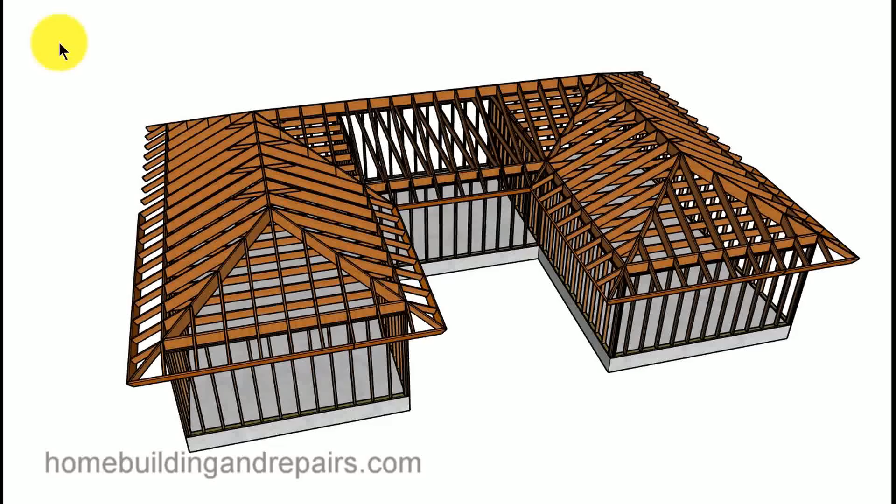Here's a project someone requested. They wanted to know how you could build a room addition in between two hip roofs with a shed roof. Let's go ahead and take a look at the framing here, give you an idea of what we're dealing with.

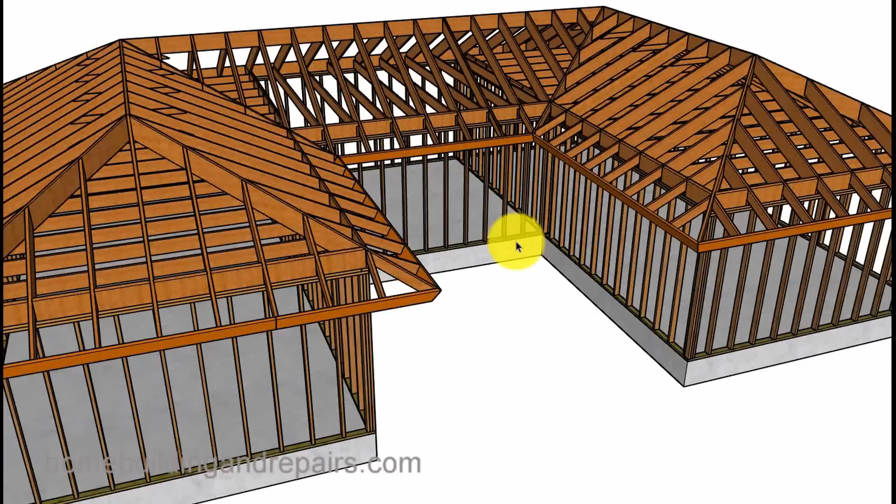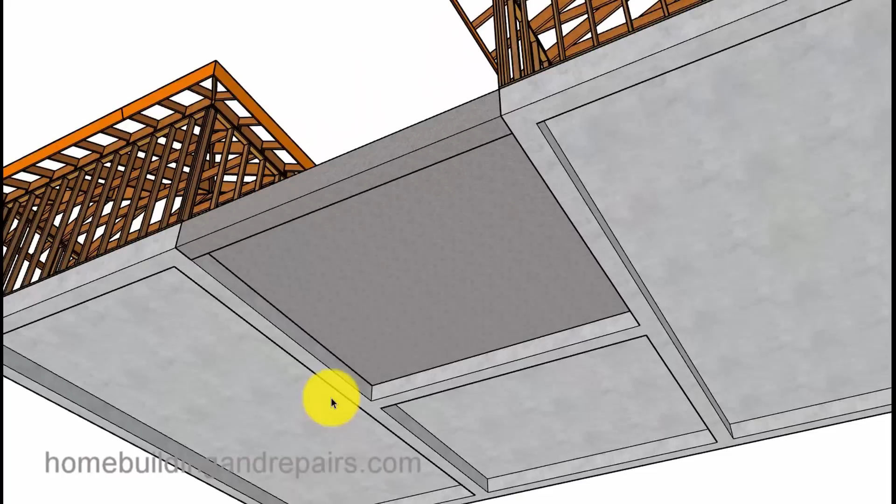And again, my drawing is not going to represent every home that is built this way. We need to keep this in mind, especially when it comes to the ceiling joists that could alternate directions. Let's go ahead and start with the foundation, and mainly the video is going to be about the roof framing, but I figured I would throw this in there.

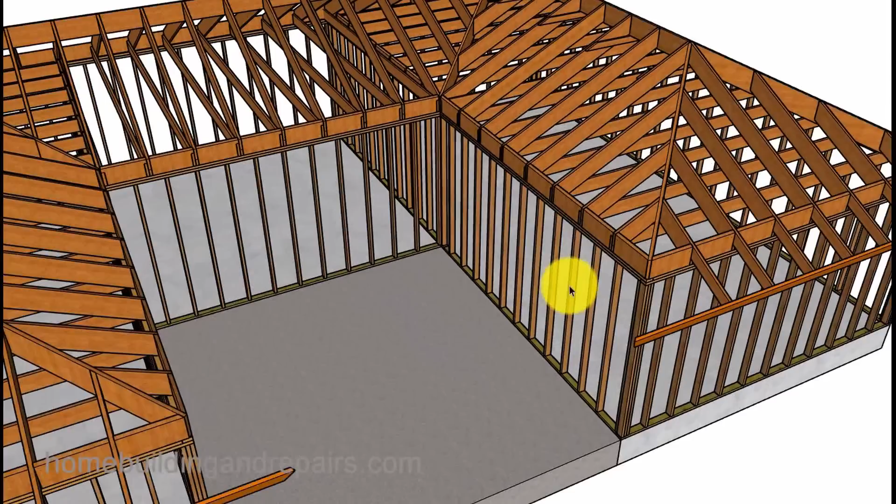You would have an existing foundation with load-bearing concrete footings. You would also need a load-bearing concrete footing in the front for this type of design. And you would need to cut the roof rafters back. Going to need to make it even there, so the overhang will get cut off. The hips will need to be cut off at the corners so that you can create a nice flat surface to build with.

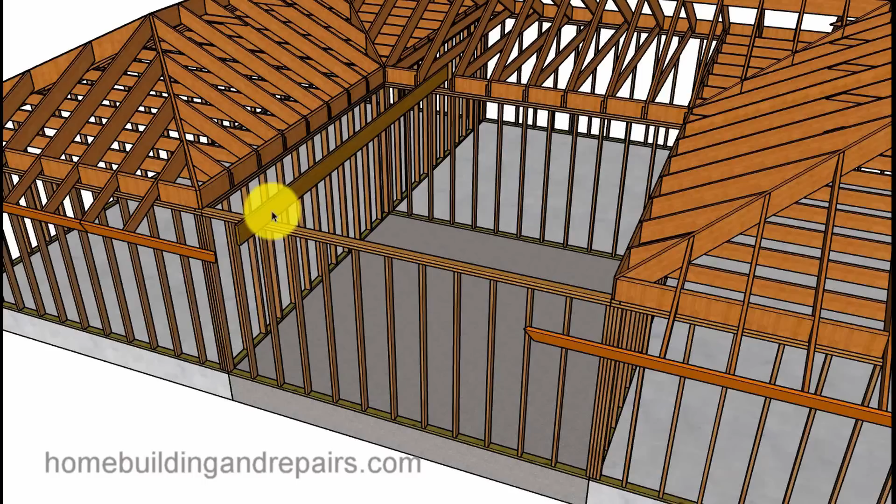Now the next thing you need to do is figure out the pitch of the roof rafter and whether or not you will be happy with a sloped ceiling. If you want a flat ceiling, that will be the last design in the video, I believe. And if you want to have a sloped ceiling and a sloped roof, then you will need to raise the back end of the rafter and the ceiling joists, of course. And don't forget to allow for insulation.

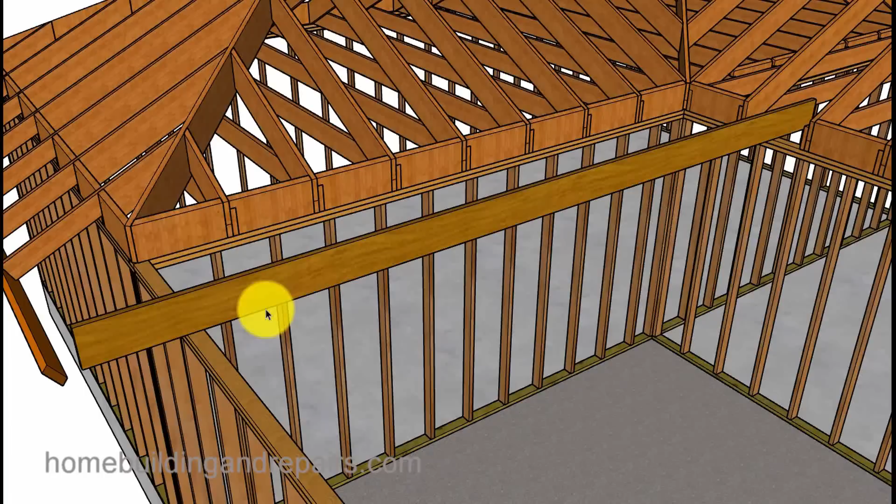The minimum size for a roof rafter that's going to be used for ceiling joists will need to fit the insulation in it. So I'm using a 2x10 here that will be fine with R30 insulation if that's what you're using in your area. Now let's go ahead, and I sloped these. I provided you with a few different ones.

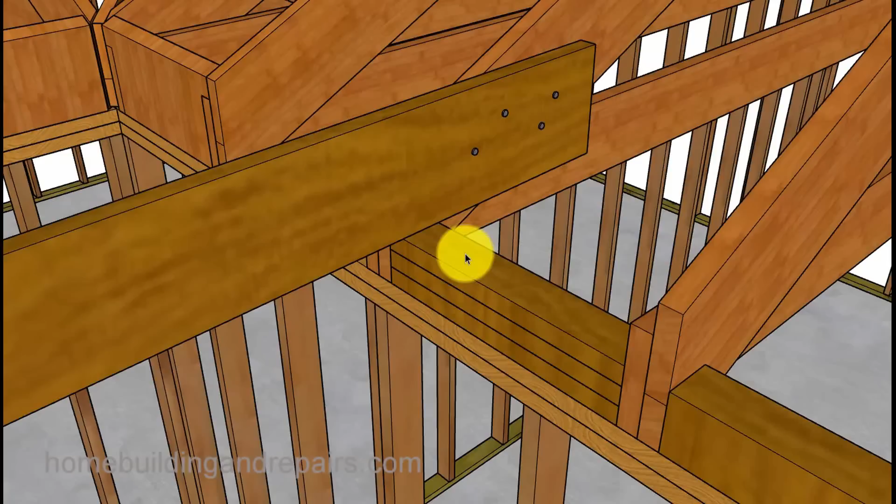You can figure out the slope, and the slope is usually going to be 1/4 of an inch per foot minimum. I like to go with something a little longer, but we have a 16-foot span. So we need to go up at least 4 inches. If I use three 2x4 blocks on top of the framing plates, that'll give me 4.5 inches, which would be fine. You will need to nail these roof rafters to the existing roof rafters, or the ceiling joists, at least every 4 foot to get a good tie.

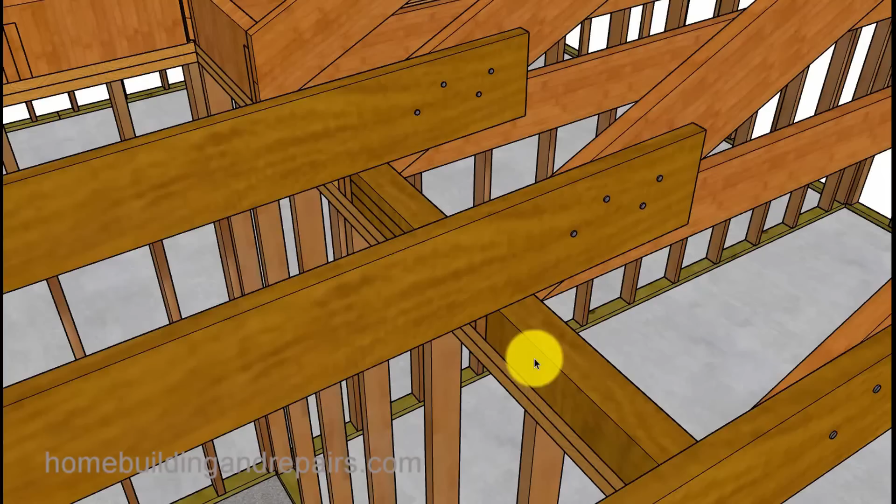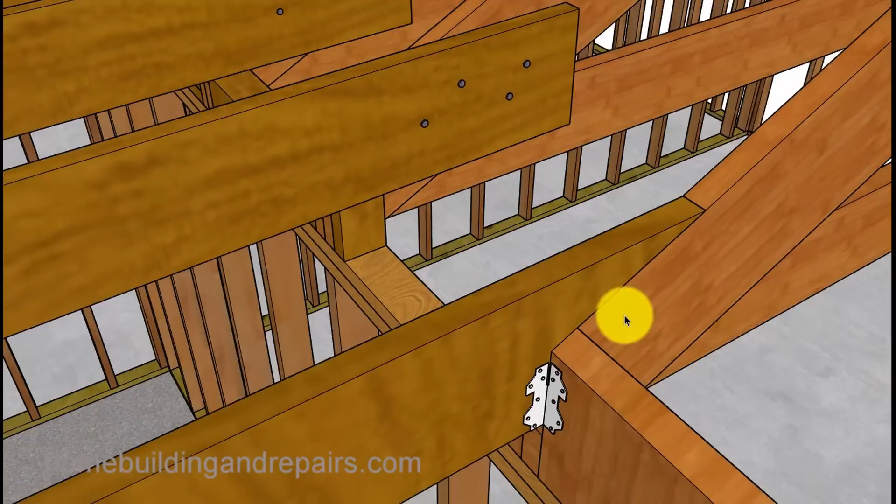Another one you can use would be a solid block. You can always use a 4x6. You could use a 4x4 with a piece of 1/2 inch plywood underneath it. And you could use a little 2x4 also. Remove the rafter there to give you an idea what we're doing. And you can always put it on top of the roof rafters if that would work, and then use framing hardware and straps to help you connect everything.

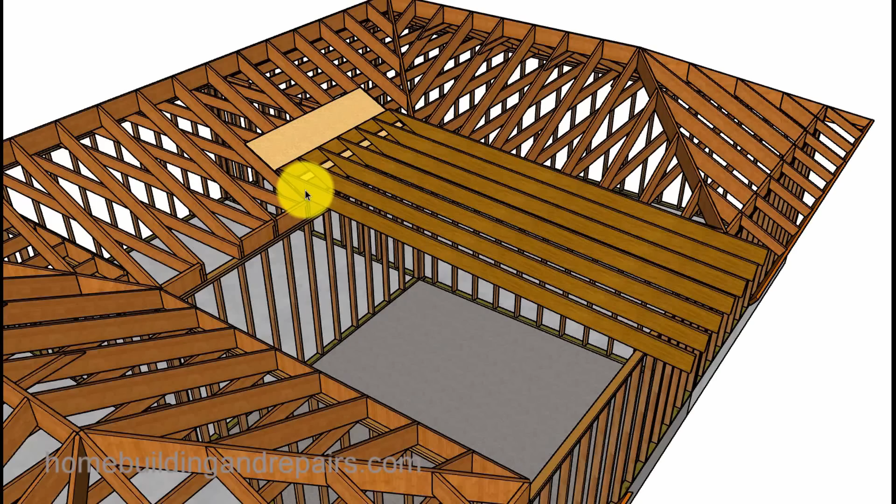In this example, I am going to slope the new roof rafters and set them on top of the existing roof framing, including the sheathing. You can set them on top of some sleeper boards, 2x10, 2x6, something like that. Make sure that the rafters have enough support underneath them. Doesn't always need to be solid for something like this, but it's very important to have it underneath the heel here, and then something up here because you might need to nail. A lot of engineers require nailing along the perimeter here.

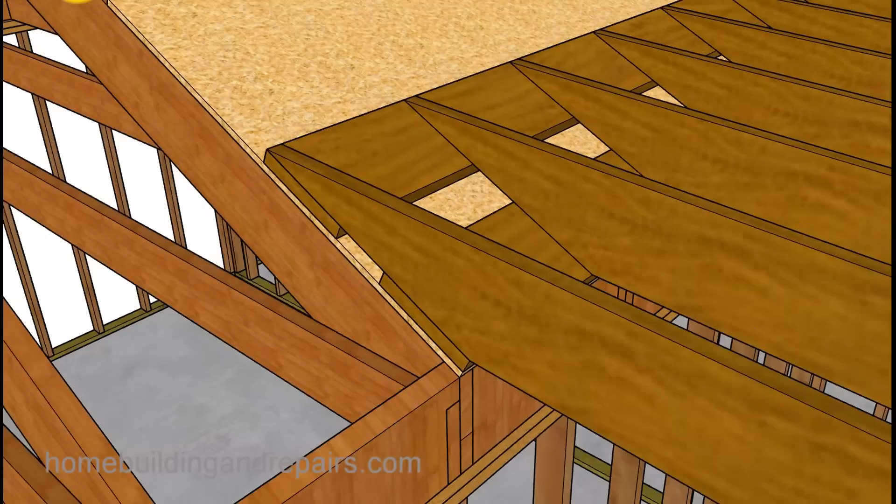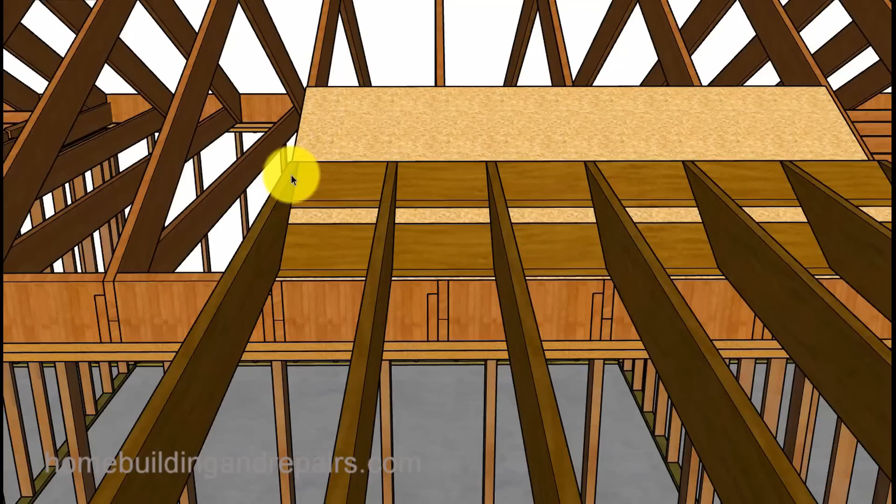Now I drew this in here with the existing home having 2-foot on-center roof rafters, and I drew 16-inch on-center roof rafters. You could see where every 4 foot would lap over an existing rafter if you did do it this way. But I wanted to give you an idea of 16-inch on-centers. They're not always going to work out with the 2-foot on-centers if that's what your engineer requires. So you're not going to be able to use every detail like I was suggesting if you have different spacing on the existing home and the new addition.

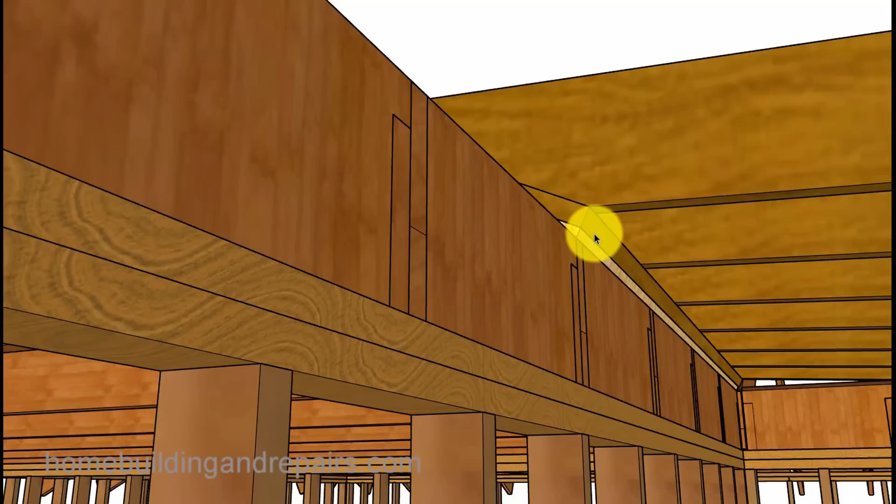Another problem I want to point out: make sure that you bring all of this stuff back far enough so that it won't create a problem for your drywall if you are going to use a sloped ceiling.

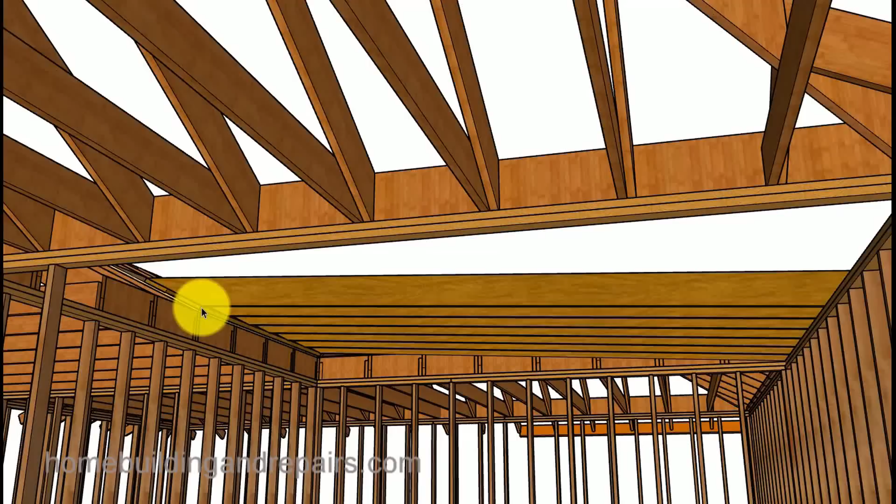You can see where this right here needs to all go back in order to create a nice corner. And again, sloping. This one here, you got plenty of slope for a 16-foot home addition because you're coming up about, I'm guessing, 10 inches, something like that.

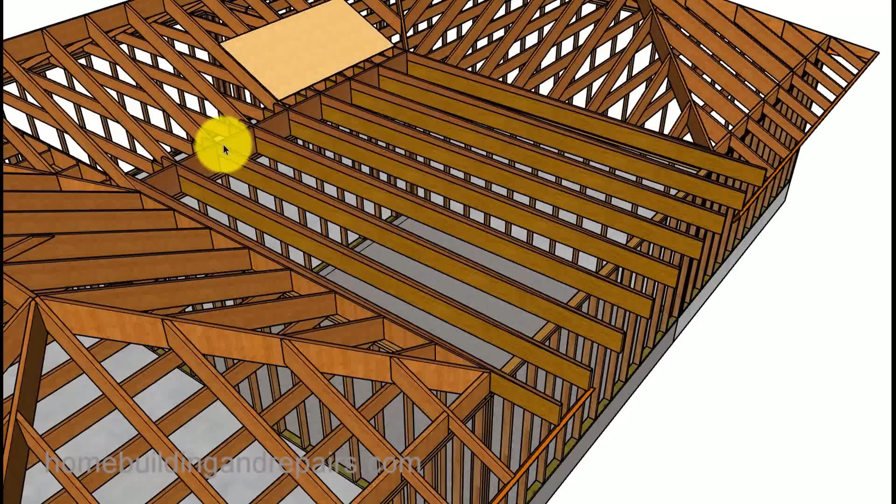This method right here would probably be the preferred method if you want to have a flat ceiling. You have an 8-foot existing ceiling, you might want to have a flat ceiling. You don't want to have a slope ceiling. Then you can always apply rip strips to the top. And of course, this would just be cut to provide the slope, the desired slope.

So I actually cut these out of a 2x6, and that would be, of course, from one point to the end. A 16-foot 2x6, of course, this is going to be an 18-footer because 16-foot would have been the span from the wall to the wall. You're going to need this to be a little longer. 5.5 inches provides us with more than enough slope, even at 18 feet, because you would only need 4.5 inches. So this would work out good.

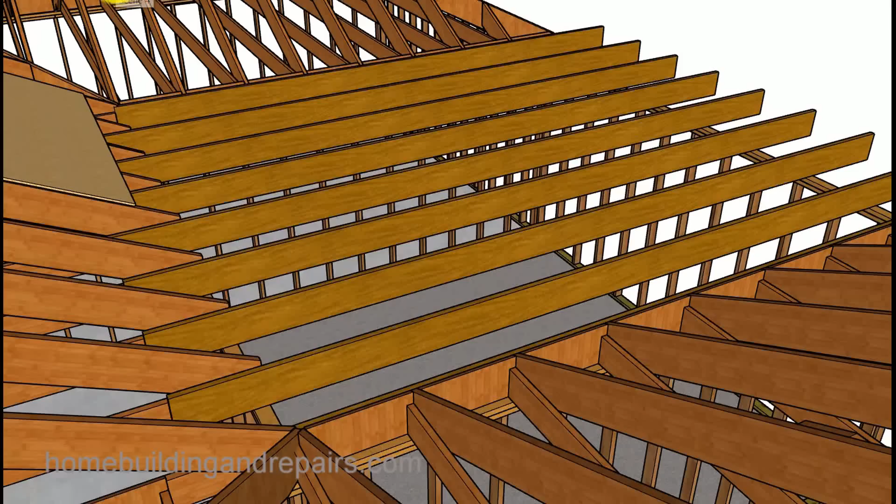So there are the rip strips gone. Ceiling joist. Again, they're 2x10, so they fit the insulation. Put the rip strips and the blocking back in there. And I wanted to give you an idea. This point right here, you need to create a point where it will intersect with the existing roof.

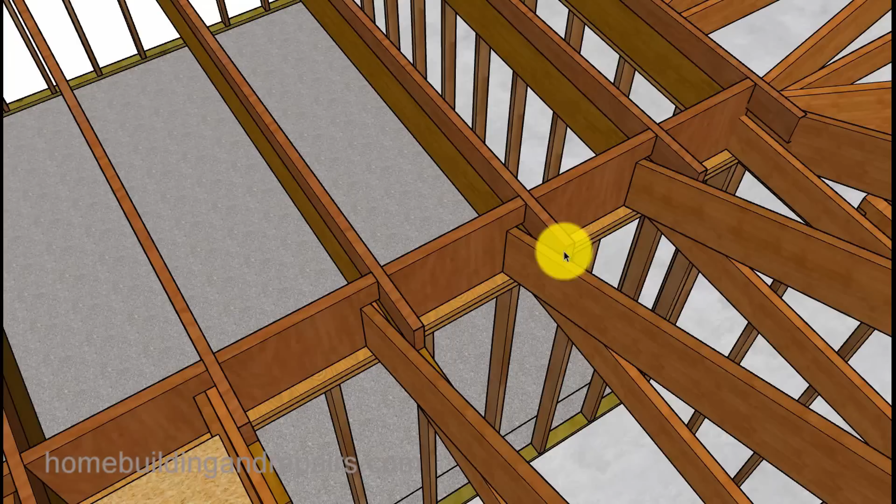So the sloping rip strips or the ceiling joist might need to extend back a little further past your framing plates. You can see it right there. Here's the end of our framing plates, but it's actually extending back a little further. Depending upon the slope of the roof, each roof will depend on where these points will intersect. And give you an idea of the rip strip that would go on coming down to nothing here.

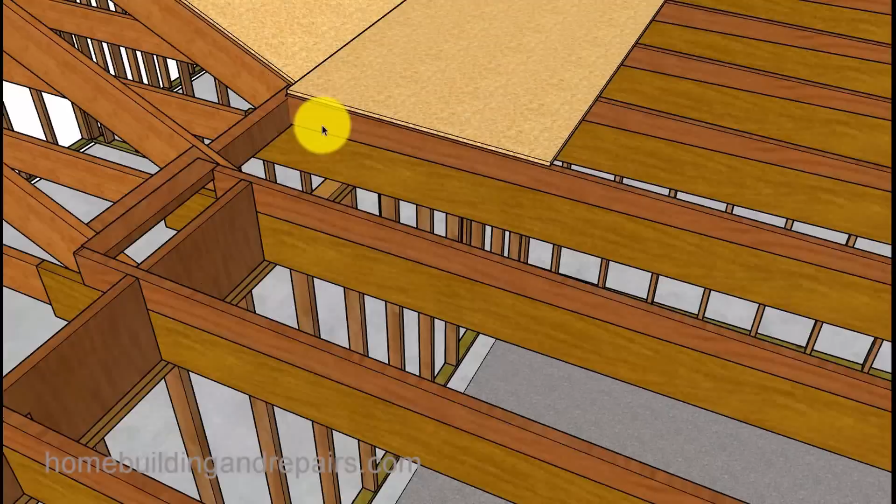You will also need to run a row of blocks over the exterior wall and possibly need something to connect the sheathing together. Either a shaped block or a couple of blocks to form something. To give you an idea what I'm talking about, a lot of times the engineer is going to want the pieces of plywood where they join together at the sloped sections to have a nail that you would drive through the plywood into one block. And this block could always be wider also, but a lot of times they want something to connect the plywood together there. I don't know if it would be necessary for something like this.

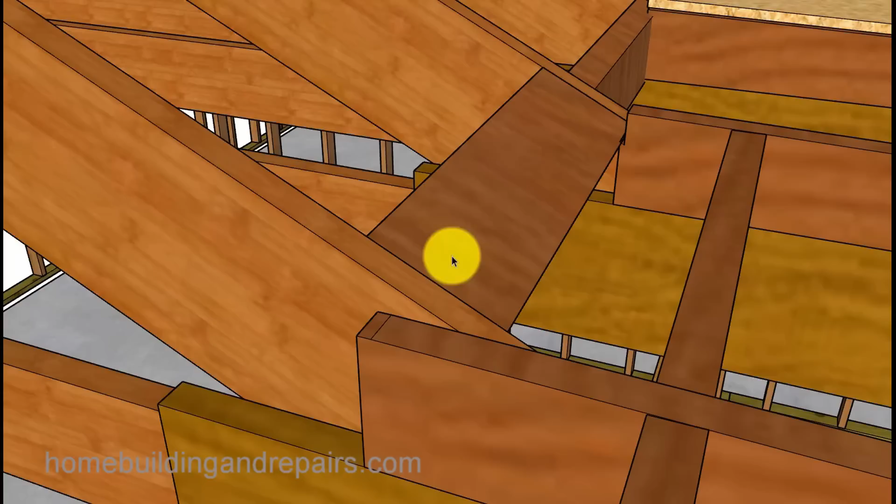You could always use a 2-block system if that would be approved by your engineer. And that would simply be a shaped block that would go on top of this block. The nails would actually connect into this block here, but whether or not it would be enough to make the engineer happy would be up to the engineer.

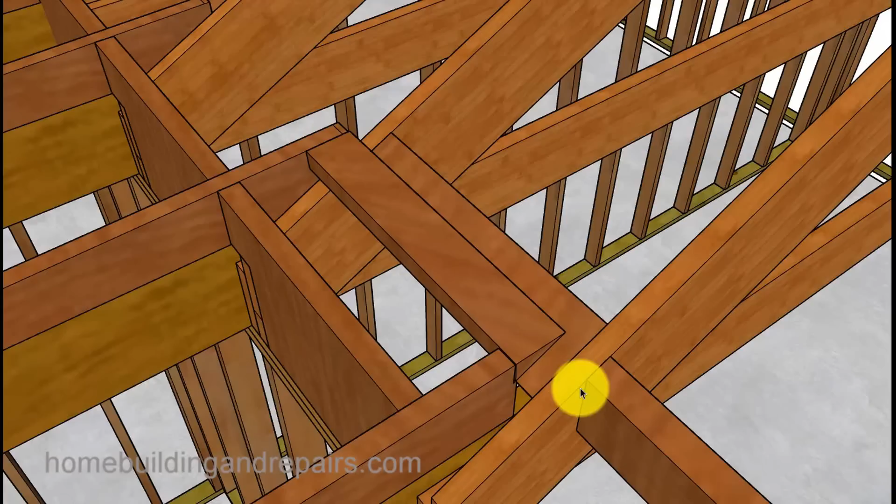How's that? I went ahead and I cut one of the rafters or the rip strips, left this one a little longer, and then made this one a little shorter. If you make your rip strips shorter, maybe you could just run a longer piece of the shaped block you're going to use here. Hope that makes sense. And that is what it would look like with the ceiling joist, 2x10s, and the rip strips connecting to the blocks. And then, of course, our blocks here.

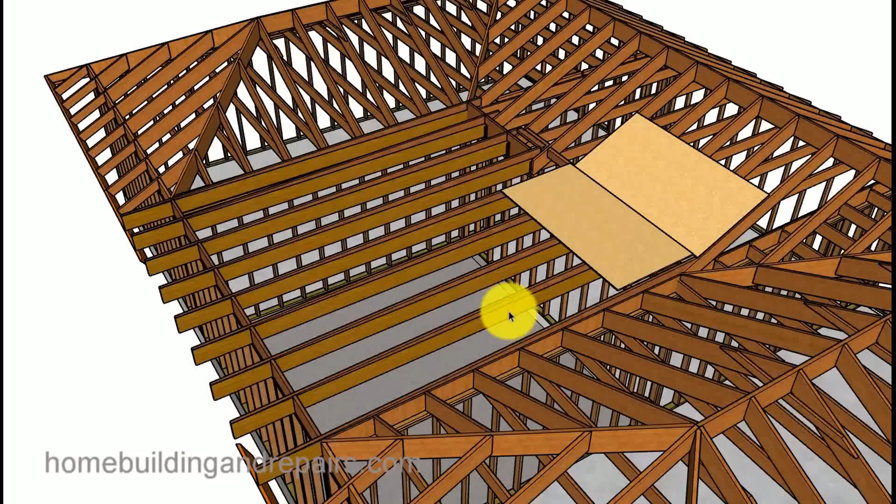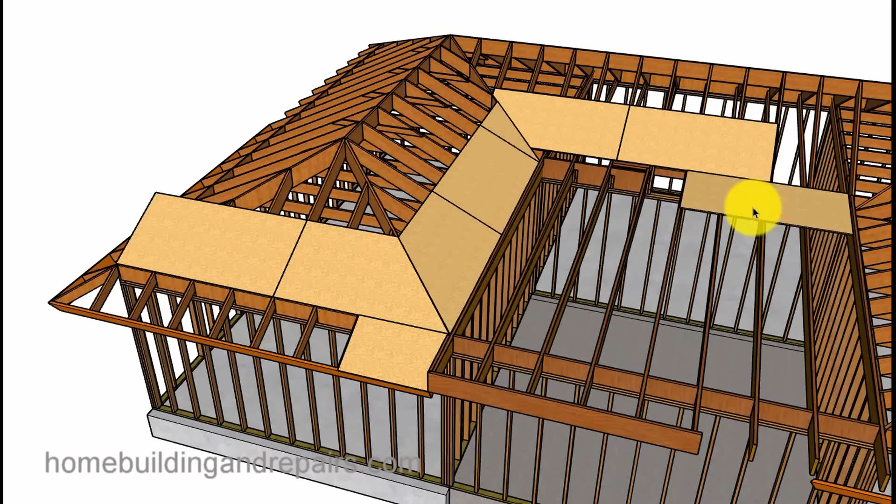Another thing you're going to need on 16-foot, even though I didn't draw it in, would be mid-span blocks. And this would just be another row of blocks in the center going all the way across. To save myself some time and make the video a little shorter, I'm going to just show you how to do one side and do the sheathing and everything on it. Instead of doing both sides, you should be able to get the idea that this side will be the same as that side. So let's go ahead and zoom in.

Give you an idea of the fascia board here. The fascia board will require a little rip strip on top if it's level, and that's actually what we have. The fascia board here is level, so I kept this return level, put a rip strip on. If you want to change that, feel free to.

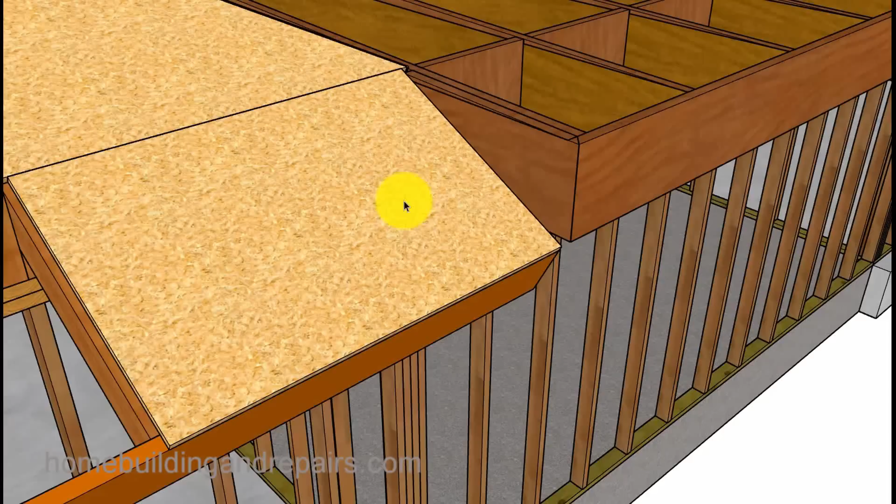Since these slopes are different, you will have something like this. And again, it would depend upon the slope of your two roofs. Fascia board, ceiling joist, roof rafter, existing setup. Of course, it's been modified to fit. And you can leave a gap if you want in between the two pieces of fascia board or put them tight. That'll be up to you.

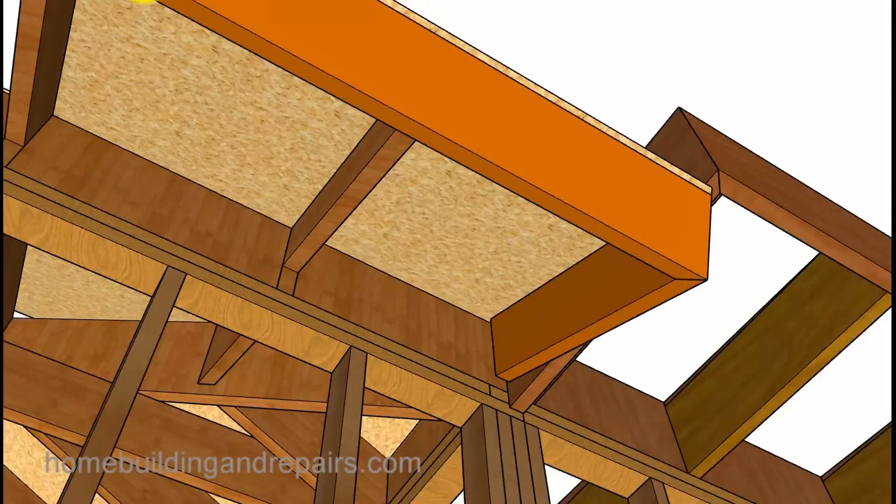And to give you an idea of what we're dealing with, the existing roof is going to be level at the plane here running along the perimeter. But this right here is actually going to be sloping up. So it's going to kind of die into nothing here, but it's going to be sloping up and getting a little bigger as we come back here. So hope that makes sense. So you will end up with a straight board here.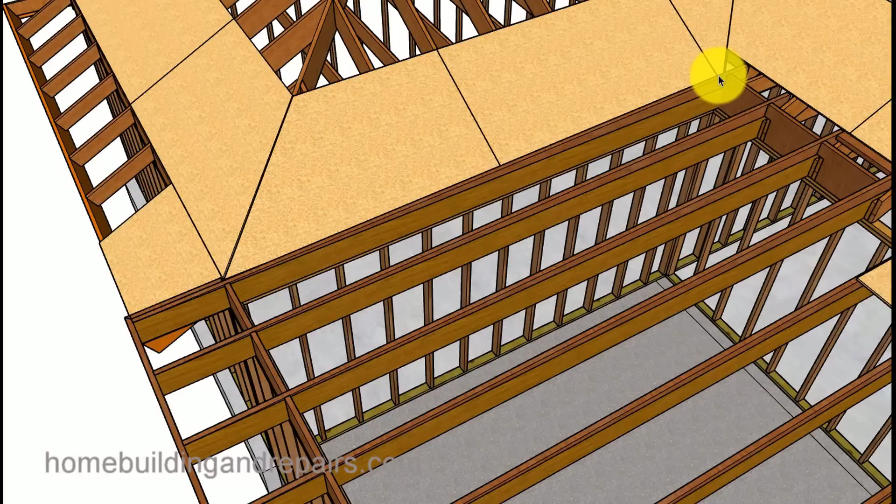Now, the engineer might require you to run an additional framing member in here, 2x4 or a shaped member. I did not draw that in because I didn't think we would need it for something like this. But again, because it's not going to be spanning more than 16 inches or 24 inches, whatever we're working with here, 24-inch span. So again, that would depend upon the engineer.

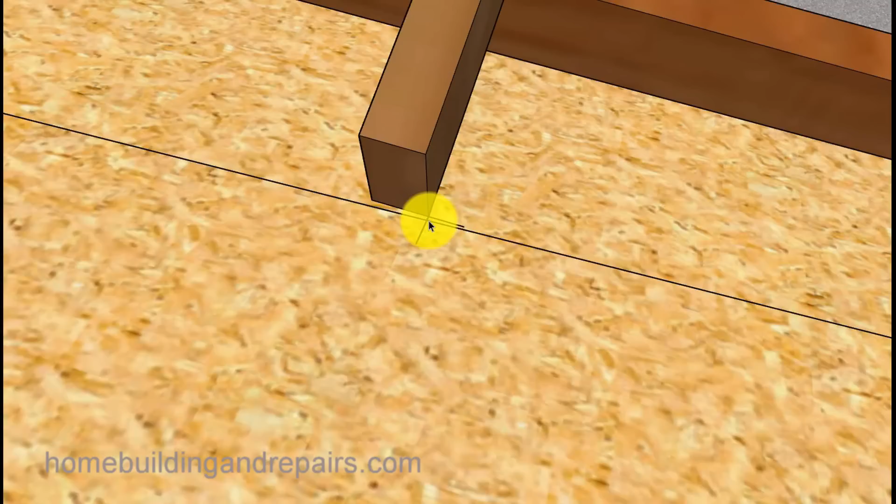Then you could use a straight edge or a straight piece of lumber and set it on top of the rip strips and then slide it over until it is touching the existing sheathing. Then you can make a mark you can use for your line. And you can see here where our line that we're using is a little bit off from the mark that I did here. I just wanted you to be able to see it. If I put the point in there, you wouldn't have been able to see it. So this is the point right here. Don't just draw a line across here. Make sure that you have a point that you can use for your line.

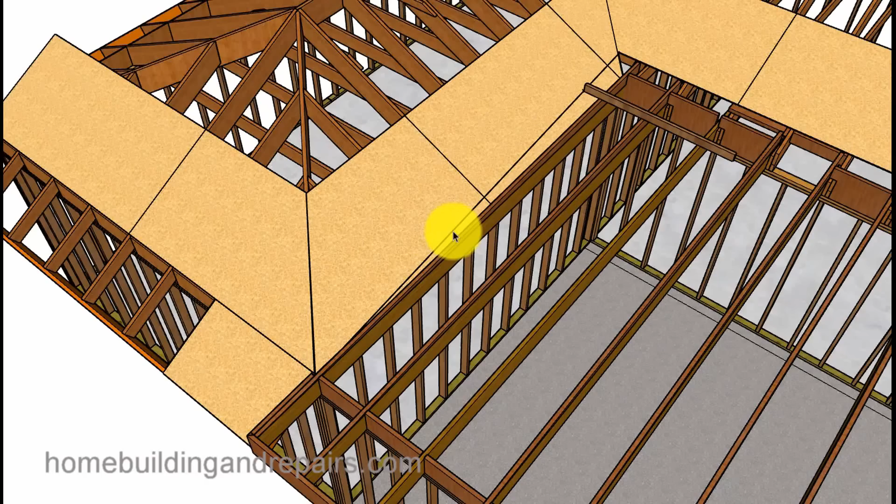There's the line on the sheathing. And you can move the straight edge to the farthest point back to make your point, and then move it to the farthest point over here to make your point, and then connect the 2 points. Or you can do as I'm doing here and make another point here and then snap a line all the way through and then snap one all the way through here. Whatever works, as long as you get a line that is going to be working for your roof sheathing.

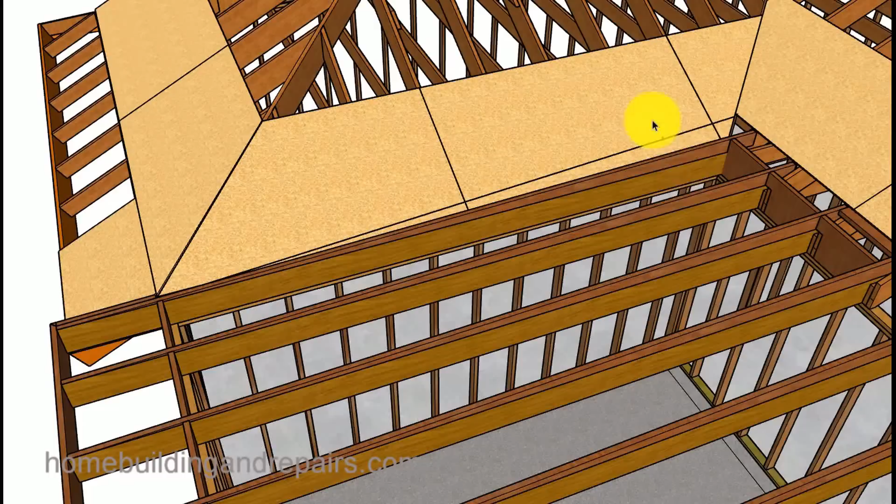So this will be the edge of the sheathing right here that we are going to use. So the bottom of the roof sheathing will connect here. And again, this is where you might need to install a 2x4 or a shaped piece of lumber, and it might need to be nailed to your roof rafters through the sheathing, depending upon the engineer.

Wow, there it is, sheeted already. Too bad we can't do that in real time, huh? And who knows, maybe in the future we will.

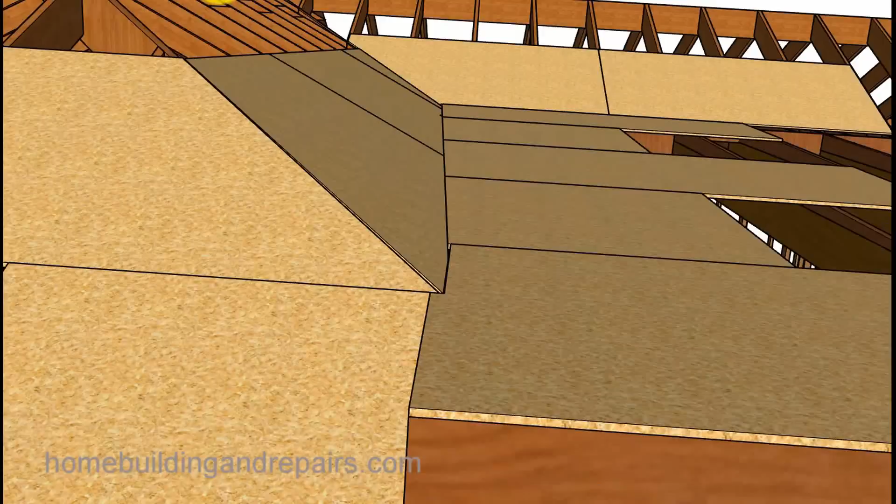You can see right here that this is going at an angle. It is not straight across here, and this is sloping down. Take a look at it from the top to give you an idea. This would be a straight line that would be parallel to the building foundations and interior walls. And this right here is sloping, so the water will come down here and then work its way down. Water here will come down and then go down to the edge of the roof.

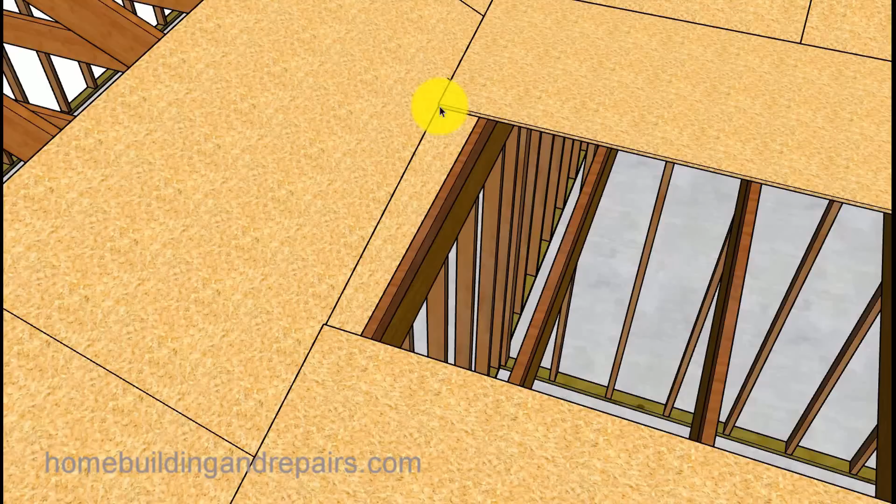Wanted to take the piece of plywood out here to give you an idea what we're looking at. You can see here where the new plywood, the bottom corner, is touching the line. And of course you can see where the new rip strips are a little higher than the plane on the existing building.